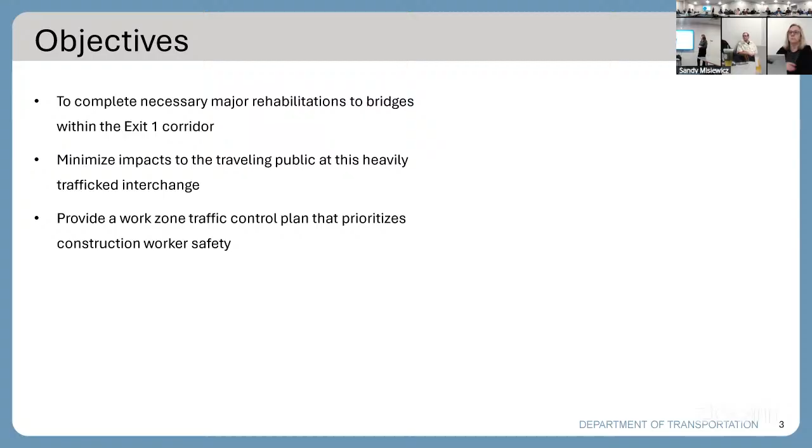There's the overview. We have quite a few bridges at this interchange. They were all built right around the same time, and they are all coming due for major rehabilitations at the exact same time as well. 50 years is generally regarded as the lifespan for a concrete deck, and all of these bridges are going to be coming due within the next decade.

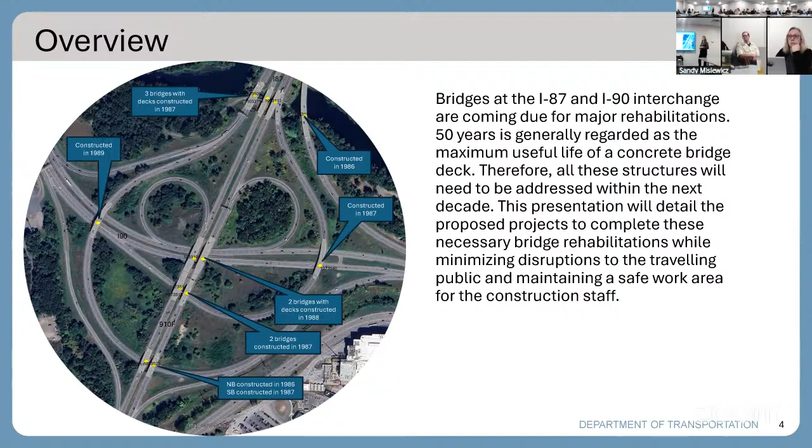This presentation is going to detail the phases that we're going to use to do this work without major traffic disruptions at the interchange while maintaining worker safety. First I'm just going to give an overview of each of the bridges within the interchange.

We have these three bridges over Rensselaer Lake. This one right here, which I would call the worst condition bridge of all the ones in the interchange, was built in 1987. It's got a pretty poor deck condition rating.

33111 was originally constructed in 1959, and had a major rehabilitation in 1987 that actually reduced the out-to-out width of the bridge. You can see here there's still the existing pier from the existing out to out.

33112, the straight portion, was originally constructed in the 50s, and then in the same 1980s contract, they put in this curved section of the bridge that joined the bridge for the ramp. These two are in okay condition, but they're definitely going to be due for a major rehabilitation soon, and could use some substructure and superstructure repairs as well.

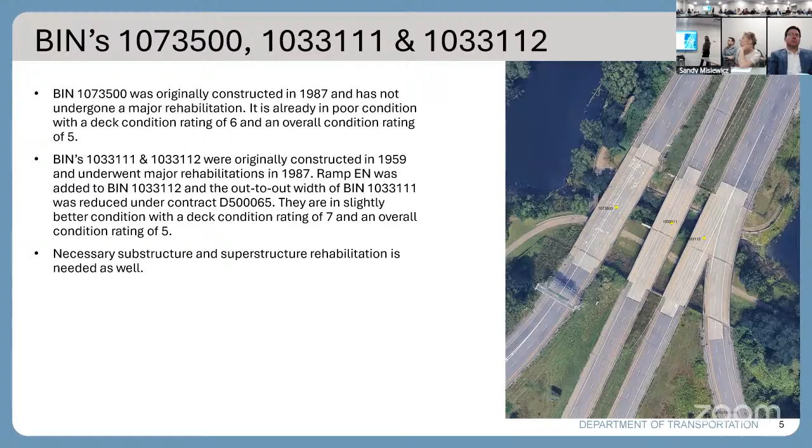Now these four bridges are past the highway designation. I believe this is 912 technically. 511 and 512 were constructed in the 1980s contract.

101 and 102 were originally constructed in 1959, and had new decks put on in 1988. All of these are in okay condition. They definitely need some substructure repairs, bearing replacements, and these multi-span bridges are good candidates for incorporating link slabs into the new bridge.

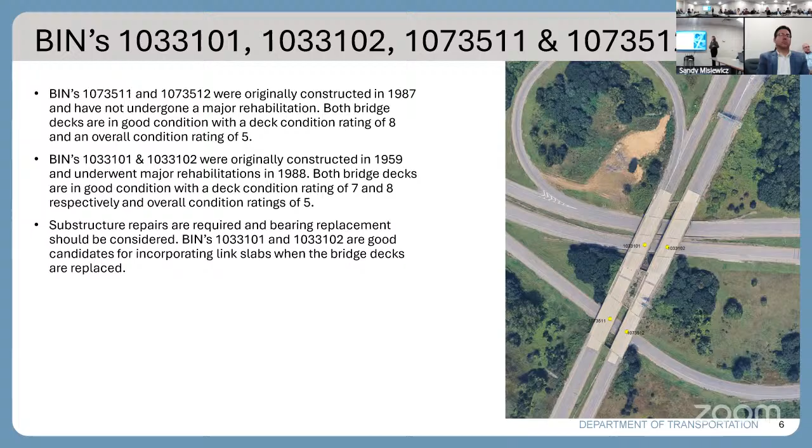Then these two, farther down 912, 521 and 522, were originally constructed as part of the 1980s contract. This one's in better condition than this one - you can obviously see the potholes right there - but yeah, they're in the same boat as the rest of the bridges at the interchange.

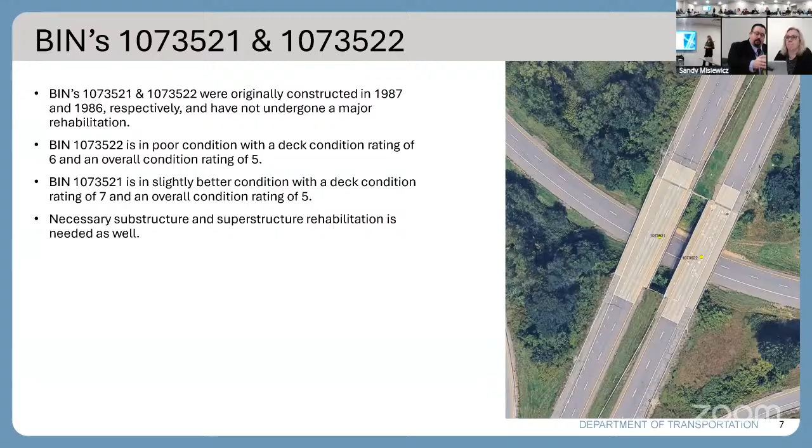We have these three curved ramp bridges within the interchange. They are all about the same condition rating, and they definitely need a major rehabilitation.

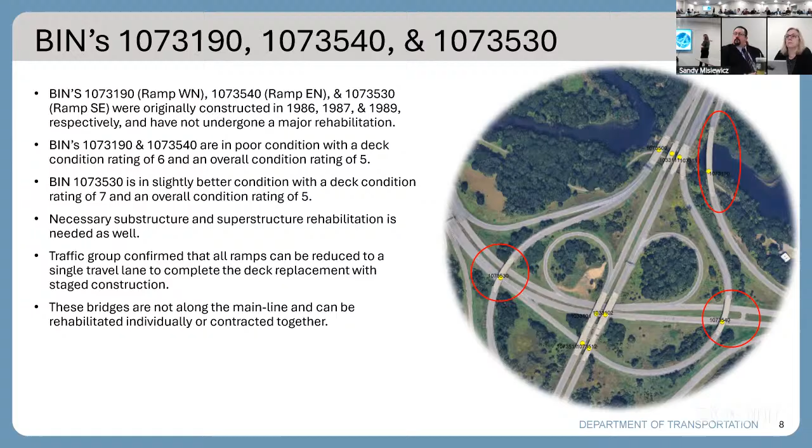When these bridges are ready for their major rehabilitation, we can reduce them down to one traffic lane and do staged construction. So these three bridges can be contracted out individually or as a group together with the three curved bridges, or incorporated into project one or project two that I'll get into later. But they're not part of the main line, so we're not as worried about incorporating them into our work zone traffic control strategy here.

Project one is really only going to address our worst case bridge here for the ramp on I-90, and this bridge here that used to be wider. So the plan is to actually widen this bridge back to its original out-to-out width, utilizing and rehabilitating the existing substructures in order to set us up for the second stage of this project and future projects to maintain work zone traffic control.

As part of this project, I think we're all familiar with this ramp that got reduced to one lane to minimize truck rollover risk. I'll touch on that a little bit - it's something that can be or cannot be included in this project to restore two lanes of traffic to that on-ramp.

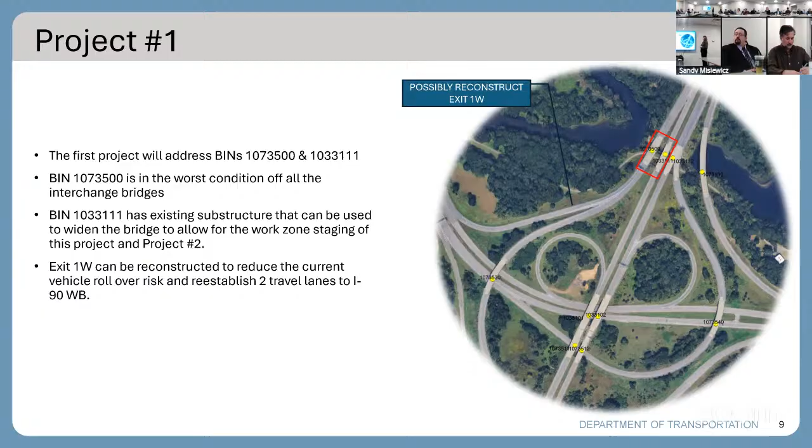Project 1, phase 1, is reconstructing the center bridge here to its original out-to-out width. We have some different sections here, and in doing this, we would just shift traffic over, maintaining two 11-foot lanes with shoulders.

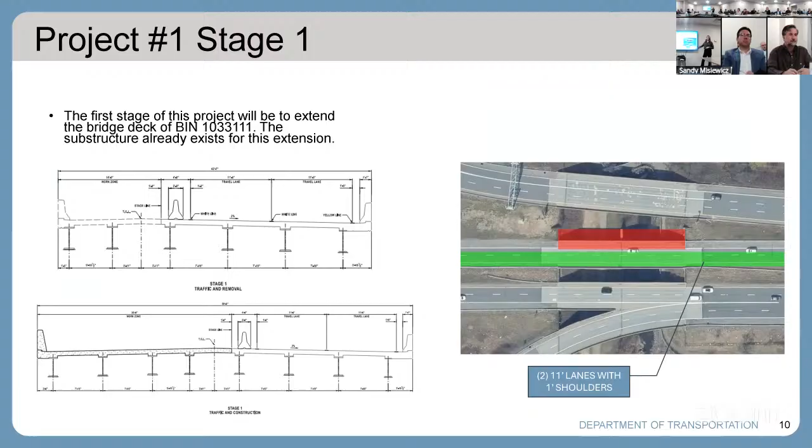Project 1, stage 2, this would be completing the deck replacement on the other side of the center bridge and shifting traffic to the newly constructed side. This lays out the traffic control - we would still be able to maintain 11-foot lanes with shoulders on the bridge, and the lane configuration would be similar to existing traffic patterns.

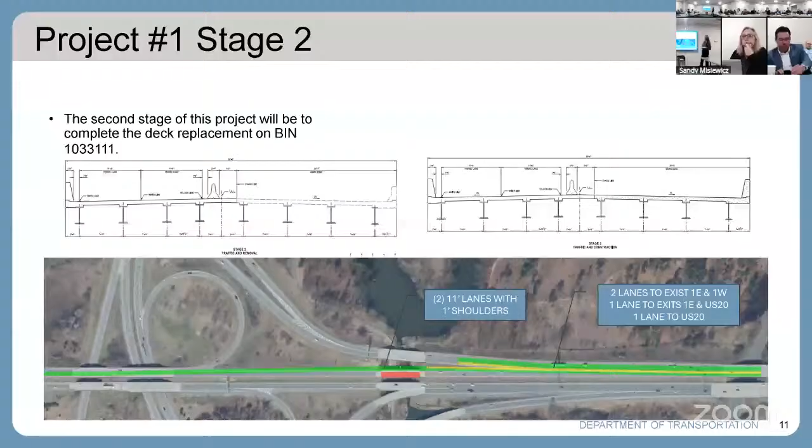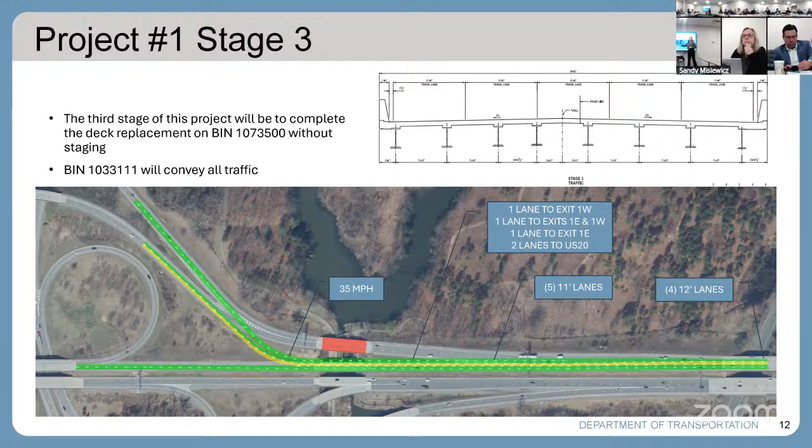Stage 3 of this project would convey 5 lanes of traffic onto the newly rehabilitated center bridge. This would allow the contractor to complete the bridge replacement on the ramp bridge without staging, and would also allow for more work area to do the ramp reconstruction, if that gets decided to be put into this project.

This is project number 2. Every bridge at this interchange has its individual needs. However, to minimize the need for multiple crossovers and prolonged construction, these rehabilitations are proposed to take place simultaneously under 1 contract or 2 — I'll get into that later. This would address 7 bridges, this one here, and then these 6 here.

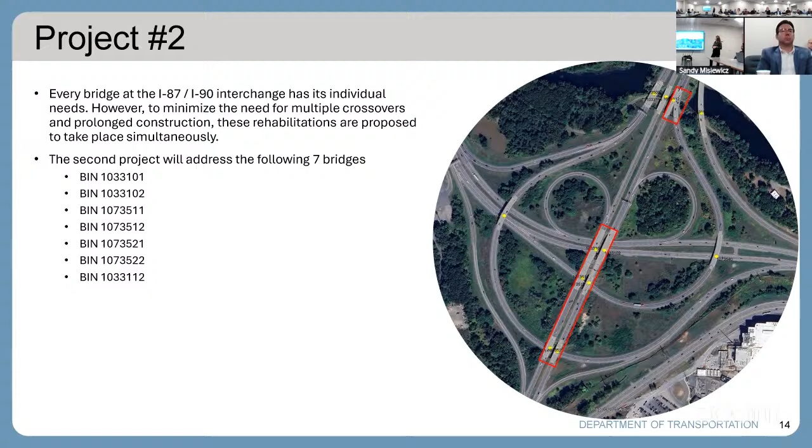This is stage 1 of project 2. We're utilizing the new out-to-out that we just established on the center bridge to convey both directions of traffic on the southbound line. We will have to have crossovers here and here, and in doing so we'll be able to maintain 11-foot lanes and a similar traffic configuration to what we're used to. The only control pinch point is right here, where we'll have to do a 10 and 11-foot lane — this is the narrowest existing point on this main line.

Back up to here — this one would be completed using stage construction. We would maintain the curve ramp and 1 lane of traffic for the on-ramp, and then these 3 bridges can be completed without staging.

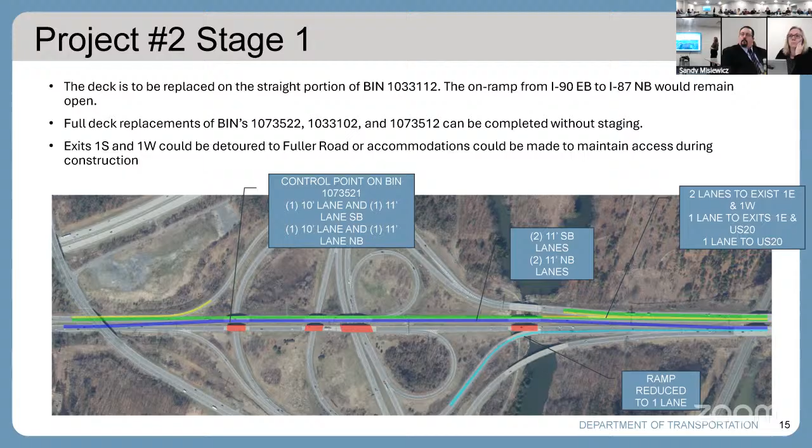Project 2, stages 3 and 4 can all happen under 1 contract or be split into 2 — so stages 1 and 2, and stages 3 and 4, could be separate projects if desired. This one is addressing all of the southbound bridges, the 3 southbound bridges we have not yet addressed. These will need to be done with stage construction, and in order to accommodate the minimum lane requirements, this one would need to be widened just slightly, just under 2 feet.

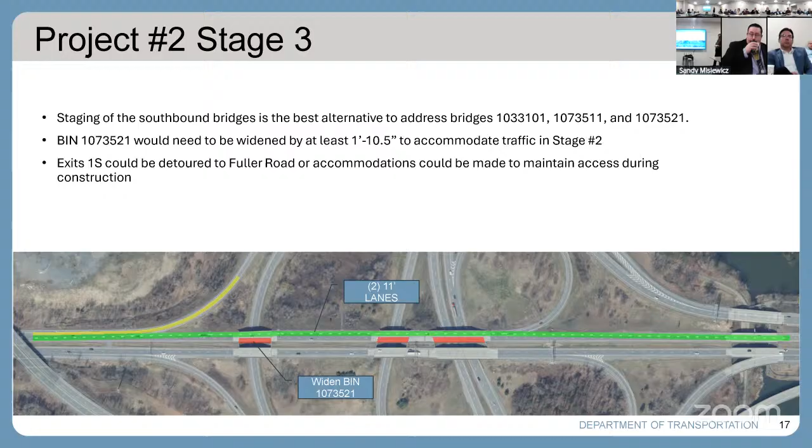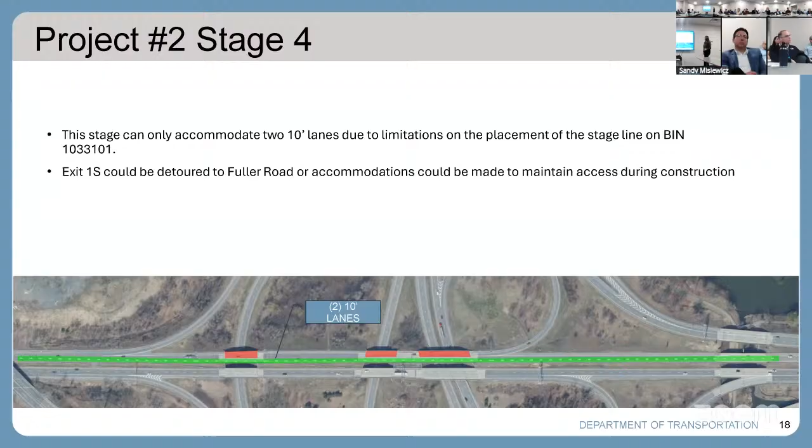Cost and schedule: project number 1 is currently being scoped, with the construction start estimated for 2029. Our preliminary construction estimate is about 8.5, and if we include the ramp reconstruction, about 9.9.

Project 2, like I said before, can either be one contract or split into 2. These are 5 to 10 year plans — stages 1 and 2 could be completed in 2034, and stages 3 and 4 could be completed in 2039, or they could all be lumped together and done at the same time. The estimates for these are about 18 and 15 million respectively. The 3 curved bridges, like I said at the beginning of the presentation, can be addressed individually, together, or included in projects 1 and 2.

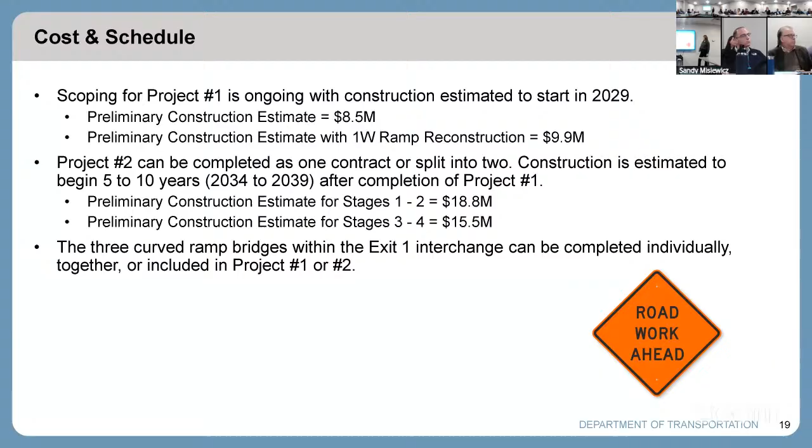How much longer is it gonna take me to get to work now?

Hopefully this strategy will have very minimal impact to the traveling public. We're pretty much keeping the same lane configurations, but it is going to be driving through a work zone, so there will be some learning curves, but these are long-term closures. Once set up, it's pretty straightforward — we're not going to be going back and doing short-term closures and moving the configuration from week to week. It's going to be in place for a little while.

Do you expect night and day work?

Sure, there'll be probably some night work involved. There's always some, but it wouldn't be required, because these are all long-term. You're not trying to avoid daytime disruption, it'll happen. Yeah, maybe when they're setting up the new traffic configuration, they can do some night work.

But for the most part, these are long-term configurations that they can work on during normal working hours. This was born out of trying to preserve one of the bridges without the reconfiguration. The key is widening the bridge that used to be wider. That allows us to truly stage this stuff for long-term construction, which lets us get a much better scoped project.

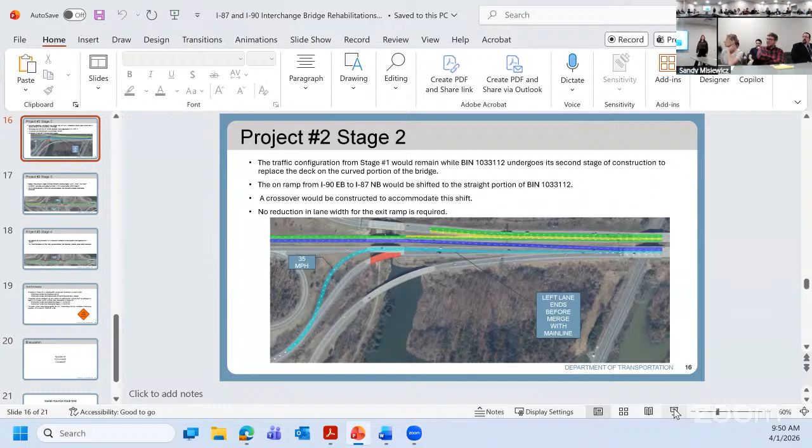That you could potentially just widen the bridge that you're replacing, and maybe have joined those two lanes, or essentially those four lanes together earlier, and save yourself from having such a long span that you have to maintain.

So a lot of these curves and ramps have differing super elevation requirements. This corridor was originally built in the 50s. They came in and added a bunch more bridges in the 80s. So it is kind of a haphazard design, but all these bridges we want to maintain. We don't want to change the traffic patterns of the corridor. Yet when everything comes through for bridge replacements, we can look at that more.

Is that a multi-use path underneath those two bridges? Yeah. So what happens with that during construction? We'll install safety measures. These are just gonna be deck replacements, so we'll have our class A containment. Maybe some short-term closures with the trail, but because we're just proposing deck replacements... or for this one here, we are gonna be adding an additional steel beam, so it'll probably be closed during lifting operations.

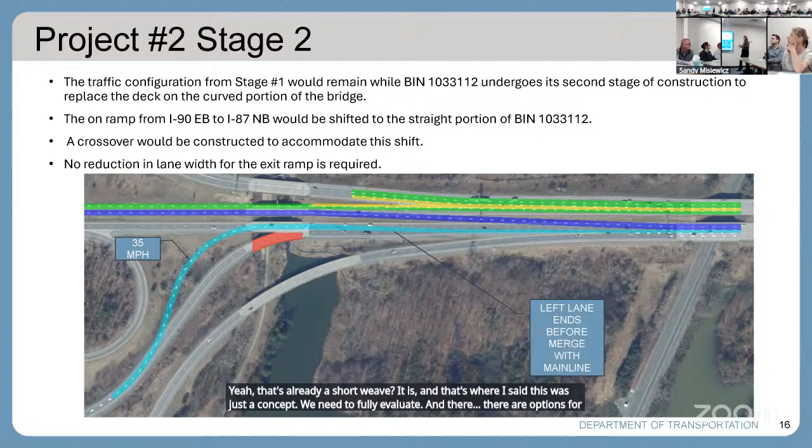So the two-lane concept you're proposing for exit 1 onto the thruway, it looks like you're shortening the weave. That's already a short weave. It is, and that's where I said this was just a concept. We need to fully evaluate it, and there are options for extending that acceleration lane farther. But that we would need to discuss with the thruway and make sure we're doing something safe there.

And obviously we could lower the speed, come in closer, not push it all the way out into the city of Albany's property there. So there's a lot to look at, and that's why it could be added to the project or not as we scope it out. I understand why you would want to do that, but our concern would be it's already a short weave, and now you're shortening that. It's gonna become worse. Yes, yeah.

Just wondering if you're thinking about going with two shifts to expedite the construction instead of just one shift a day.

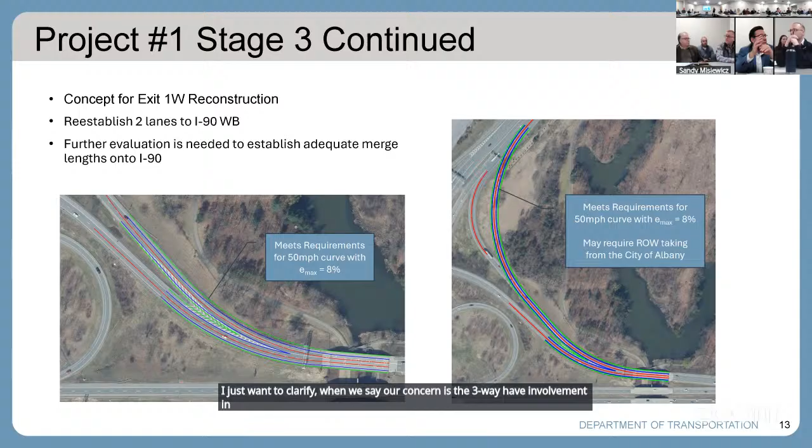I just want to clarify, when you say our concern, does the thruway have involvement? This is the first I've seen it. They will, okay. I forget exactly where the line is, but somewhere here the jurisdiction does switch. I think it's right around where the old toll booths used to be.

So obviously if we wanted to extend the acceleration lane, we'd have to work with the thruway to extend it. When you're coming off like I-90 onto 24, they're already at speeds of 60, 65, and now you're increasing more high-speed traffic and shortening that weave, it's going to be problematic. Yeah, we'll have to look at that.

Yeah, I think that happened at a lot of the interchanges, especially when you take the toll booths out. Going it's 70 miles an hour, and we have issues at exit 26 where people coming off the thruway have to turn their head 90 degrees to see somebody coming, and it's at awful high speeds. I don't think that was necessarily taken into account when they moved the tolls.

No, there's issues, but we can't address everything. Any other comments?

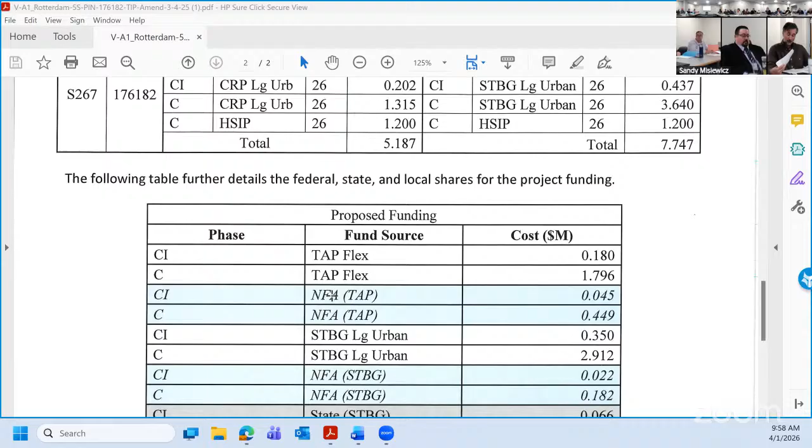This just helps get after, with various TIP amendments, we've subscribed to different fund sources. I think we've successfully utilized the CRP large urban, while the STBG large urban still had some balances, and this will help address that. We never like to leave money on the table, so this just helps balance all the books.

The STBG was Surface Transportation Block Grant. The distinction with the large urban is that it's sort of dedicated MPO money, so we at this table get to decide how those funds get used. It's one of the few fund sources that we kind of have complete control over here.

And the water line is in the way of the project? 75% of it is in direct conflict with the proposed drainage that needs to go in. We have to shift the roadway configuration and spacing based on adding sidewalk, and having a consistent sidewalk facility through the full project limit. So with that addition, because the water line is conveniently located right where the sidewalk and drainage would be, it means that 75% of the water line is in conflict.

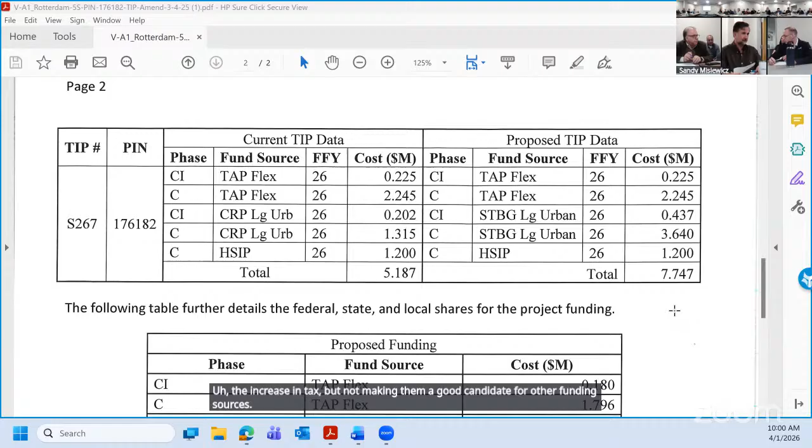Which is a problem for the town, and they've attempted to get funding for a couple of years. They're in a difficult spot of not having enough residents to sustain the increase in tax, but not making them a good candidate for other funding sources. And the reality is, when you compact the pavement, subbase, the rest of the water main will probably get damaged as a result of the project.

I just want to make sure that we have a precedent set for when utilities come into urban work, so I want to make sure it's clear what the conflict is, because I know we have a lot of old cities, myself included. I've always made a distinction that utility work is borne by the municipality, and I have no problem if no one else around the table has a problem. I just want to make sure we don't move forward with a precedent that a road project also means complete utility replacement, because then our project costs are going to go pretty high.

So that's all. We're doing Craig Street on the water main, we just dedicated $1.6 million to replace the water main before we do the street project. No conflicts though, it was just a preventative thing. So I just want to make sure I know that.

I don't know if anyone from the city of Albany is here, actually. Bill's on. Bill's on, okay. The 25% is not counted as funding that part, okay, so that's the distinction. When the project is causing a utility to be relocated, it can become a mitigation associated with the project cost, but the lion's share of highway infrastructure does not require the underground utility to move, so that's the distinction.

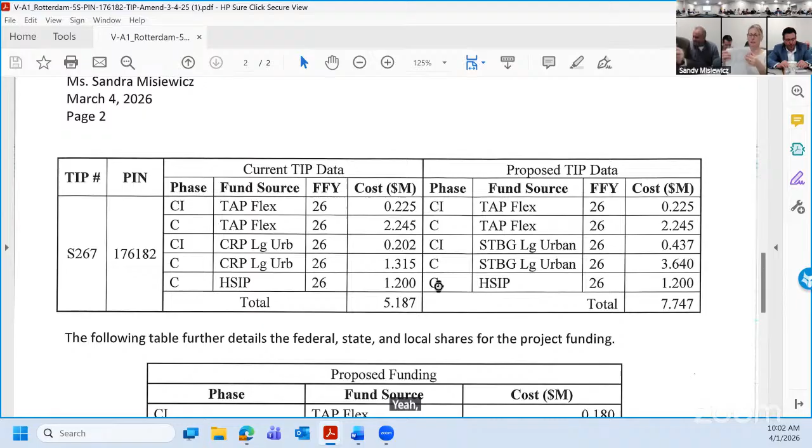City of Schenectady, Greg Wisher, you'll see amendment. This came in from DOT, even though it's a local project, because the tip amendment is related to the DOT-owned bridge that's getting rehabilitated as part of the project. DOT actually designed this portion of the Craig Street project, and of course, then we're also funding it because it's our bridge.

And the reason that Greg is proposing this amendment, not myself as city of Schenectady, is because this is a state-owned bridge. It's a share of the project that the city of Schenectady had agreed to incorporate into our local project. So when Greg and the DOT received the bids and reviewed and went through, this was a recommendation that they made, so they're presenting it essentially on the city's behalf as their share.

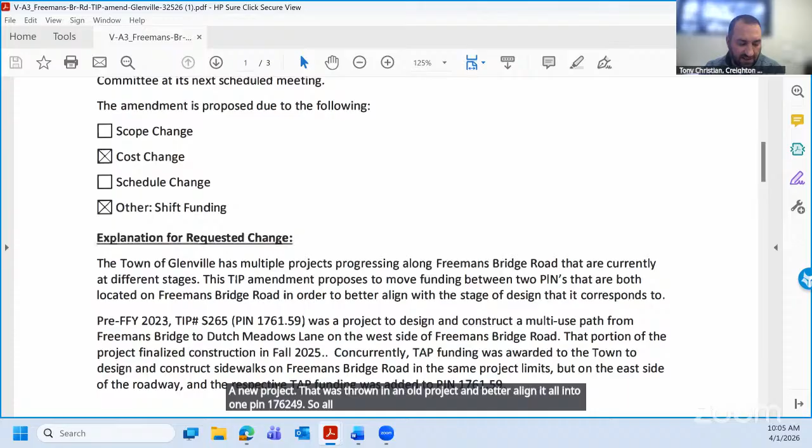So this TIP amendment is looking to shift that TAP funding from the new project out of the old project and better align it all into one pin, 176249, so all the eastern side work is under that pin.

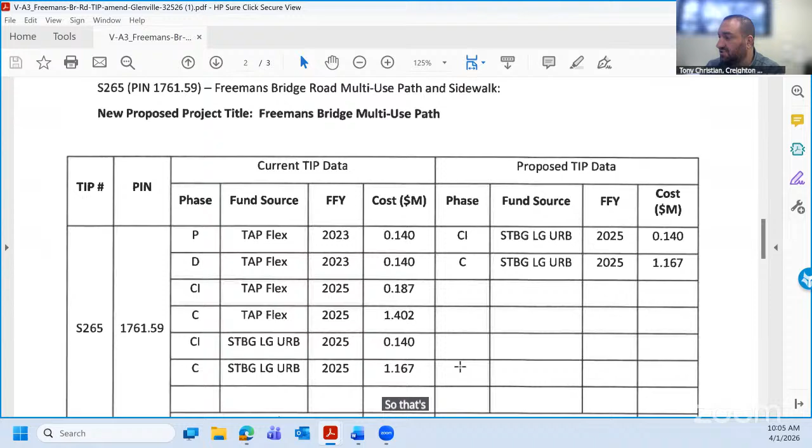Also, as part of that project, DOT requested repaving of Freeman's Bridge Road, so additional NHPP funds are being added into 176249, with the non-federal share picked up by DOT, the state. So no additional local funds are being added to the project. That C and CI funding for NHPP, the non-federal share is going to be picked up by DOT on that one.

That's it. Any questions?

Is the town going to be responsible for the paving project? Is that going to be bid as a town? Same thing, just like Craig Street, the town's bidding it as well as cohesive project. Which makes sense, it's one big project, but it takes care of our needs as well as theirs.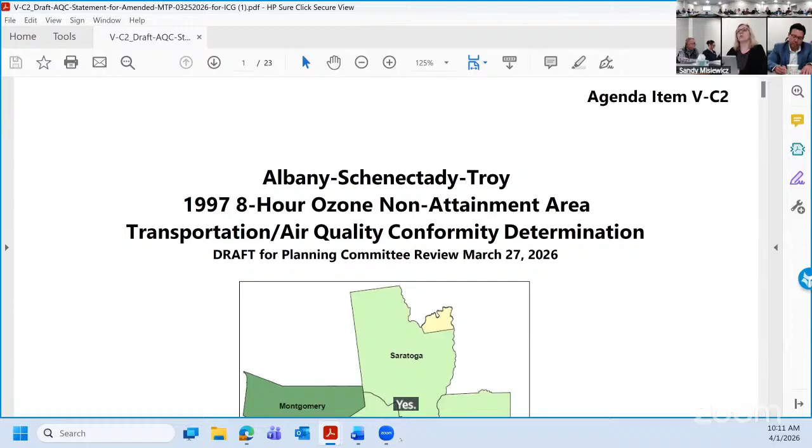One of the things that's happening tied to the 787 initiative is NYSDOT progressing the notice of intent to do an environmental impact statement, where I guess we'd term where we are right now the pre-EIS phase. As the project evolves, we will have to amend our regional transportation plan to move the project from illustrative to fiscally constrained, because the NOI puts the project in a different category of environmental review. In order to do that, we first have to amend and update our air quality conformity determination.

This is a Clean Air Act related requirement that we have to do, that's tied to the whole environmental review process. So it's got to go out for public review, and we're going to tie the public participation plan public review with this public review as well. This basically just updates the code and assigns a code for what is now a non-exempt project, because it's one of our only non-exempt projects for air quality in the region right now, and that literally means we have to do an environmental impact statement for it. So, I use the word bureaucratic, but it is a requirement under the Clean Air Act that we do this conformity determination.

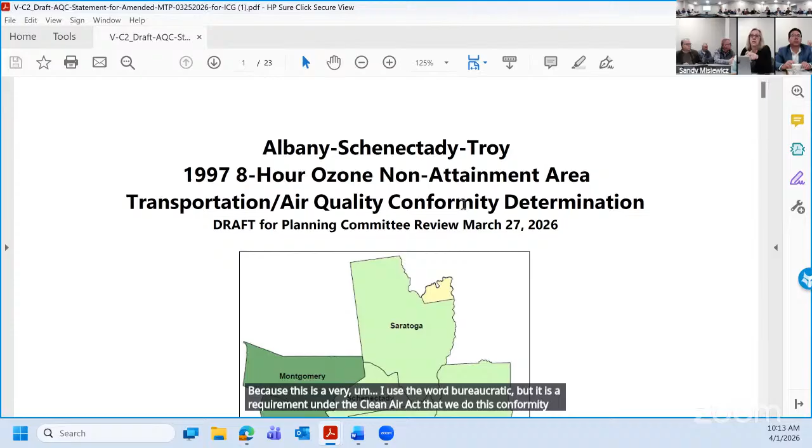We have to do that in partnership with our friends in Glens Falls MPO, as well as the 3 rural counties, Greene, Schoharie, and Montgomery. So there's sort of a joint effort. I've already apologized to our partners that because of the scale of this particular project, this may happen more frequently as things evolve. So expect not only MTP amendments potentially down the road -- I know just from our friends in Syracuse with the I-81 project, there's a lot of constant TIP amendments coming when that scale of project is going on. So just to prepare you, as things evolve here you may see more of these kinds of requests.

But this is the first step in this calendar year of an approach to getting our MTP amended to move the project from an illustrative to a fiscally constrained category. Does that about sum it up, Greg? That covers it basically, yeah. We have to take this action early because of the coordination -- our target notice of intent is, I'd say, less than a year from now, hopefully. So given the timeline, we're looking to make this action so that this can all seamlessly flow. So we hope it does.

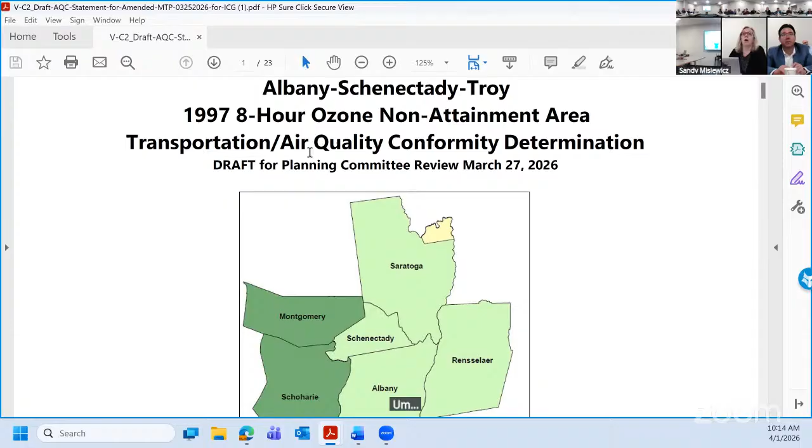Open to any questions you may have? Is it not an update that we report from 1987? 97? Oh, this is just the designation year of the non-attainment area.

Okay, hearing no questions, we'll make a motion. Lisa? Second? Mike, thank you. All in favor, say aye. Any opposed or abstain?

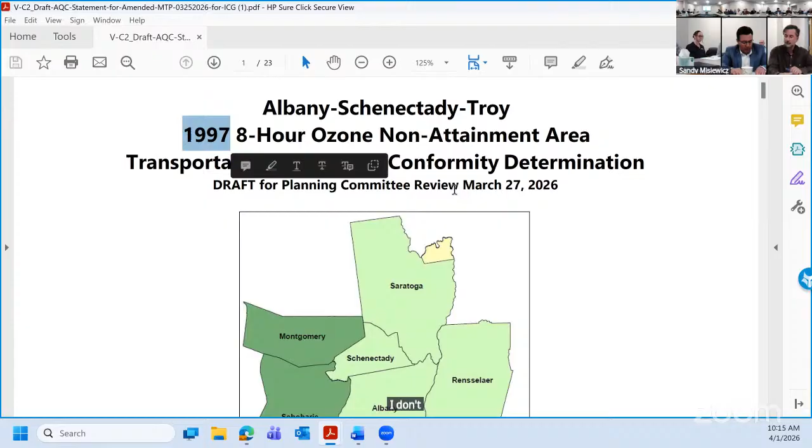No, thank you. Okay, moving on to item 6, discussion items: a roadway departure safety action plan, a local call for projects.

So we previously discussed the call for projects that's currently out for local projects for the roadway departure safety action plan. Applications are due April 17th. I know a few of you have been in contact with Carrie Ward here, talking about your project proposals.